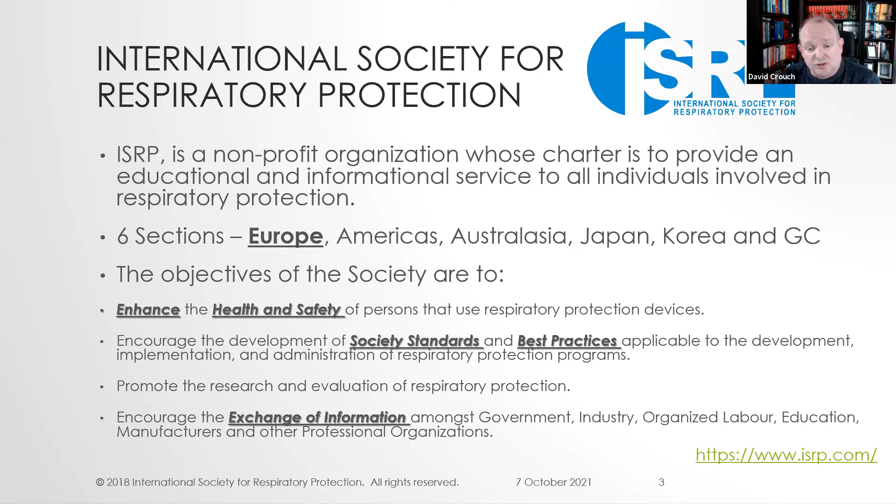So that brings us on to today's education program. The aim of our education program within Europe is to introduce attendees to different areas of airborne hazards, what type of respiratory protection is required, and how we can mitigate those hazards through new technologies and new understanding. The idea of today's webinar is around confined space, and we have 2 leading experts to discuss the background theory and practice behind confined space operations.

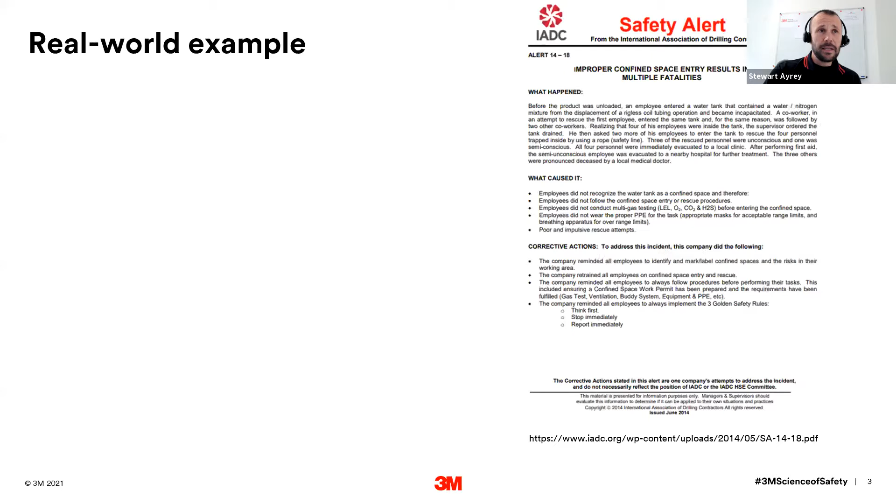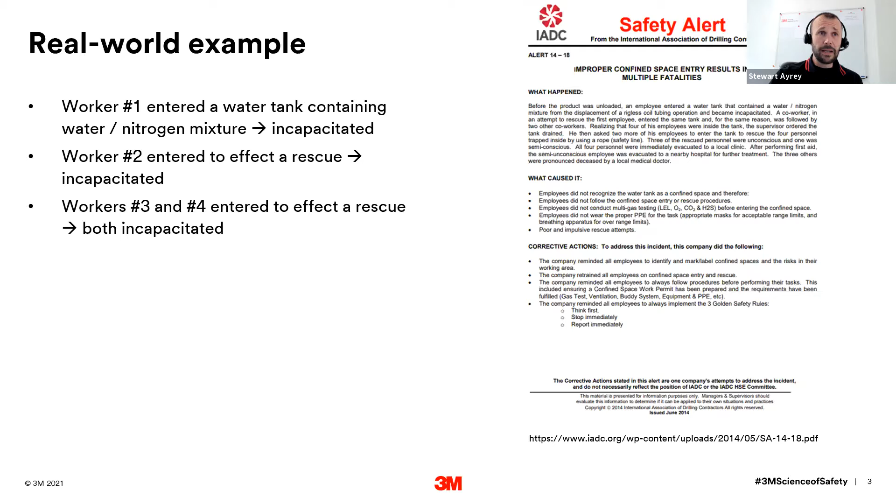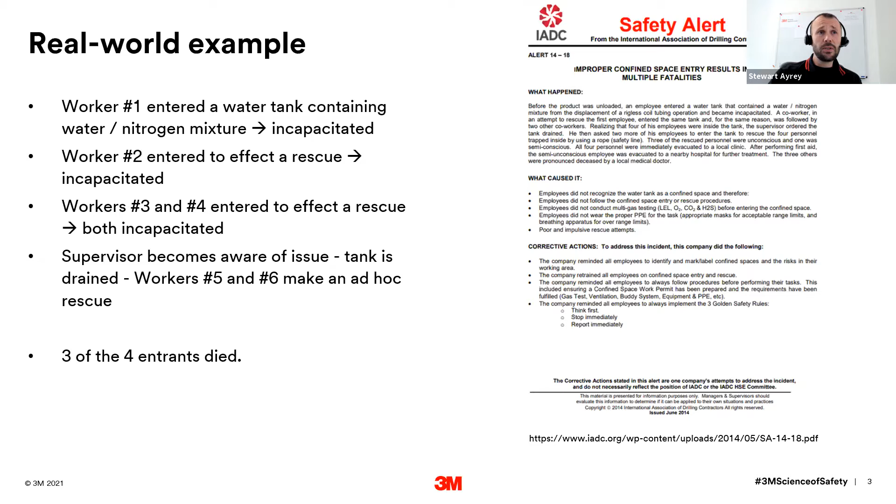Why are confined spaces dangerous? Well, this is an example from the real world, taken from the International Association of Drilling Contractors. It's quite recent, from 2014. A worker entered a water tank, which contained a water and nitrogen mixture, and he was incapacitated. A second worker who observed this entered to rescue his colleague. He became incapacitated. Two more workers saw what had happened, and they entered to effect a rescue. They too were incapacitated. By which point a supervisor became aware of the issue, the tank was drained, and a further 2 workers entered to make an ad hoc rescue.

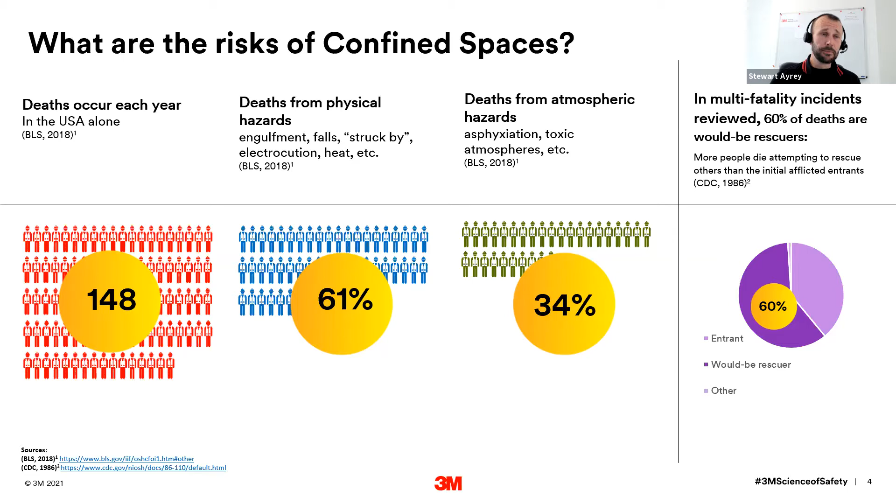Going back to that example I showed a moment or two ago, in a slightly older study, multi-fatality incidents were reviewed, and 60% of those deaths were down to would-be rescuers entering into a confined space to rescue somebody else. So this is exactly like what we saw before: an initial entrant succumbs to an atmosphere or a hazard, and one or more entrants then go in to try and effect a rescue. They're ill-prepared, and they succumb and die as well. Really very harrowing statistics.

permit access controls, physical controls, lack of atmospheric testing. Second thing is the lack of training, awareness with people who enter confined spaces that they are indeed confined spaces, lack of awareness of the risks, how to enter properly, and the correct procedures which should be in place.

And thirdly, the lack of appropriate equipment and PPE. Perhaps that may also be extended to ventilation, inappropriate gas detection, access and rescue equipment.

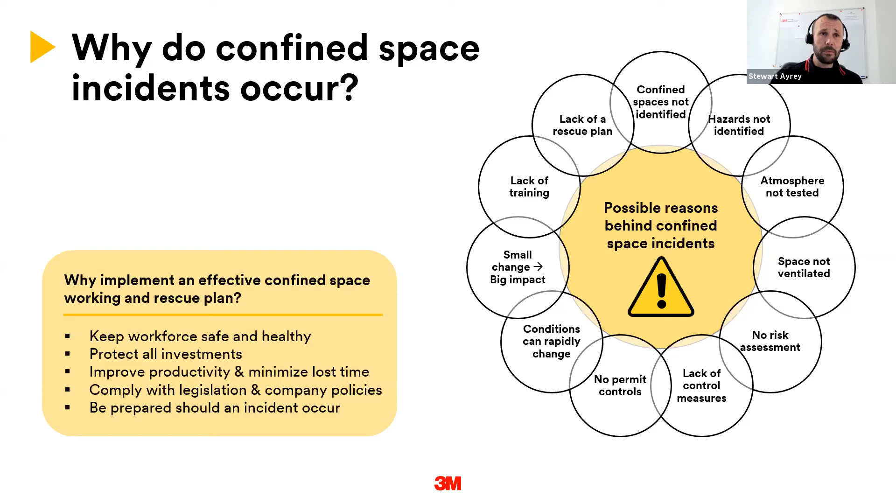So what are confined spaces? Well, I have to say that the definitions vary around the world. It really depends where you are. So do check out your local or national regulations, and the definitions do vary around the world.

But if I could surmise them all together, they have 5 common characteristics. Number one is their size, in that they are large enough and configured in such a way that a person can bodily enter and perform work. The entrance is small, it's limited, or it impedes easy entry and exit.

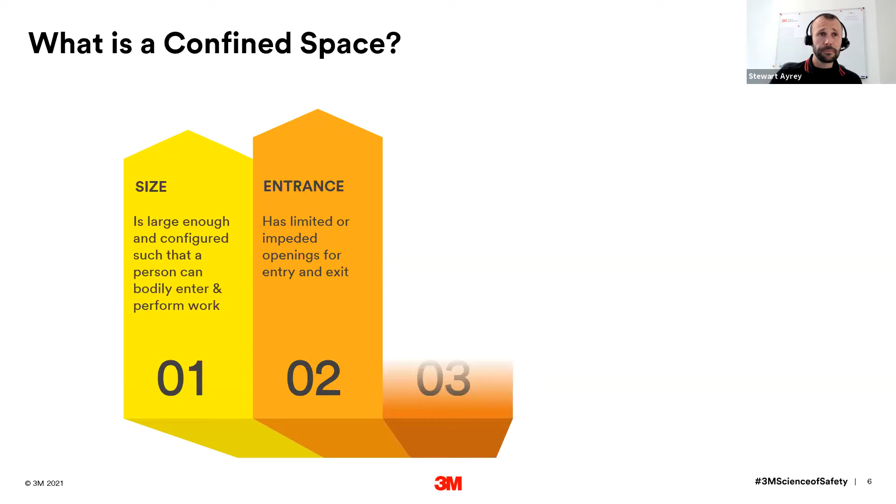Occupancy. They're not designed for continuous human occupancy. So they are something like a storage tank where normally a person would not go in to work, perhaps daily, to perform a task. There's something where somebody goes in occasionally, and when they do, it may be briefly or for a long period of time to perhaps do quite large remedial works.

Rescue. The provision of emergency response services is compromised. By this, I mean, if you, say, had a heart attack, a paramedic could not just simply walk straight in like you would into an office and be able to provide medical assistance.

The means of entry is restricted. It's difficult to get the emergency services immediately to somebody. And then, of course, and quite importantly, confined spaces often contain a hazard, a specific named hazard, which can pose a significant risk of illness or injury to those who enter.

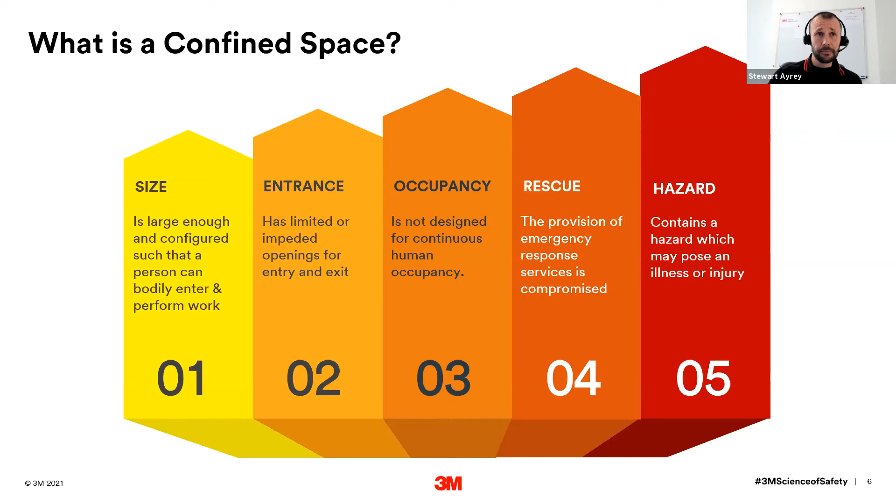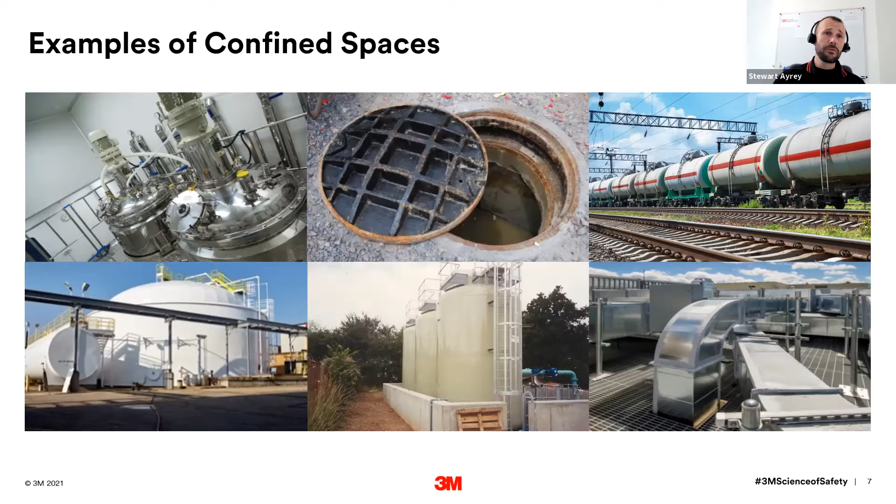Here are lots of images of potential confined spaces. Some of these are pretty obvious, like a manhole, a sewer, a tank. Some are perhaps a little less obvious, maybe heating and ventilation, air conditioning controls on a large building, or a reactor vessel in a chemical or pharmaceutical manufacturer. And I'm sure we're going to see a few more examples from Laurent, who will follow me.

What type of hazards are we going to find in confined spaces? We're going to find configuration hazards. These are things like risk of falling, entrapment, unprotected edges, fragile surfaces, sharp edges, ground conditions.

We're going to encounter things like physical hazards, electrical hazards, mechanical hazards, obstructions, excess temperature or excesses of temperature, very low or very high temperatures, pressurized gases and liquids, free-flowing liquids and solids, restricted movement, all sorts of different things.

We may encounter biological hazards, whether they are infectious agents, bodily fluids, biopharma processes, sewage, wastewater, stagnant water, rodents, rodent droppings, insects, snakes, and also things like poisonous plants, molds, and fungi.

And perhaps because we are the International Society for Respiratory Protection, we're obviously going to pay a little bit more attention in this webinar to atmospheric and chemical hazards.

So obviously we're talking about things like oxygen deficiency, but also oxygen enrichment, explosive atmospheres, asphyxiation, toxic atmospheres, and other chemical exposures, anything from active pharmaceutical ingredients, solvents, and other chemicals, and particularly those chemicals which may be encountered when cleaning or cleaning out a confined space.

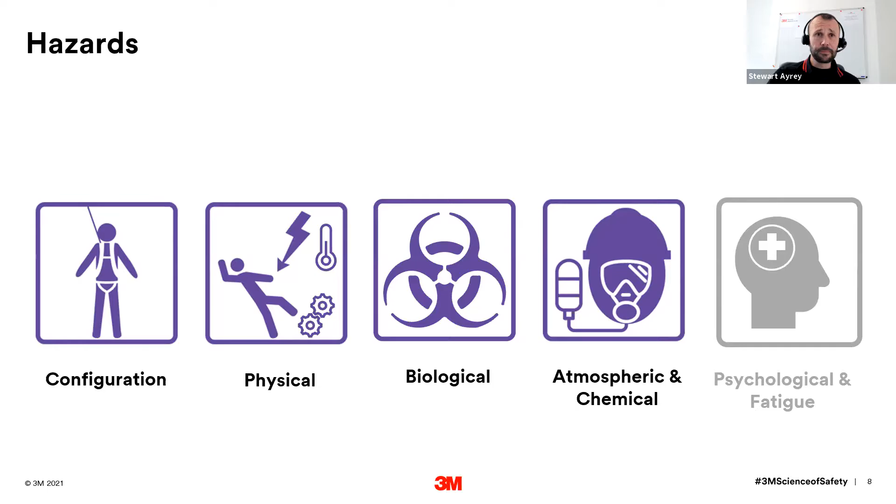The important thing to also bear in mind is that a variety of different types of people can enter. They could be from the host employer, so the company that owns the site. They could be facilities management, specialist contractors, maybe on a maintenance or repair shutdown, a rescue team, or emergency services. So control of your spaces can be very difficult due to the range of tasks and people who may need to enter them.

When we're looking to enter a confined space, we need a safe system of work. This is quite a UK term, so you may understand this with different terminology.

It may be very prescriptive depending where you are in the world, but generally these 9 steps form a solid basis, a solid safe system of work for entering a confined space.

First of all, we need to identify all of the potential confined spaces on site, prioritize them, and know what the risks are within them. Do you need to enter the confined space?

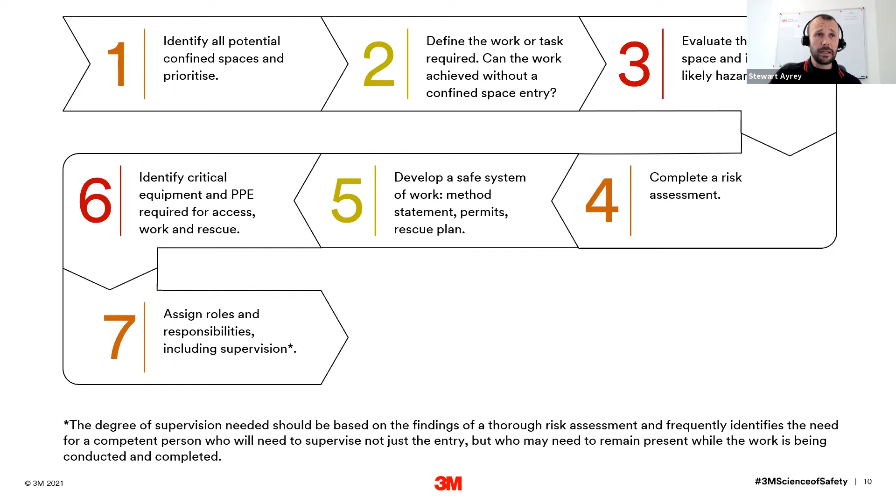From that, you can identify the equipment and PPE you will need for both entry and rescue. You need to assign roles and responsibilities to all of the entrants, the supervisor, the attendants, and the rescue team.

You need to check that all involved are trained and provide training and certification where required. Remember, competency is critical in confined space entries. And then finally, before you can enter, complete your permit controls and access the confined space.

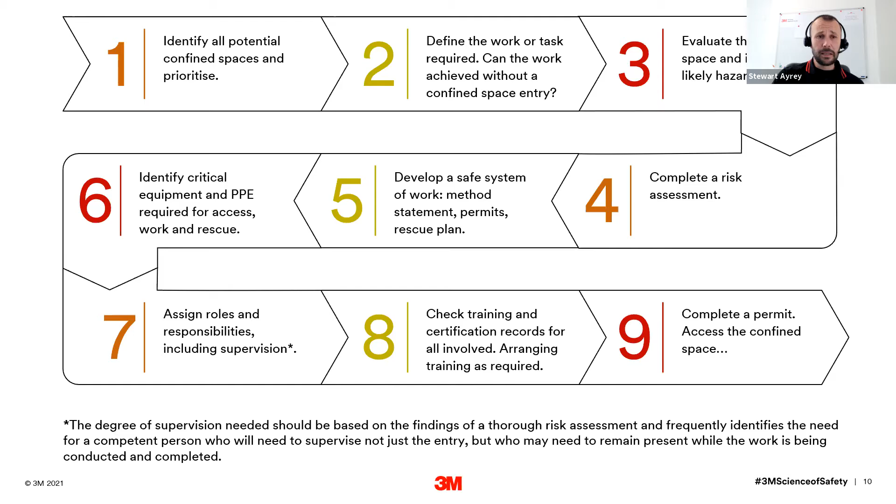At 3M, we like to break things down a little simpler into the ABCs and the DEFGs. And we'll go through each of these in turn.

Starting with anchorages, A, there are a whole load of different ways of accessing a confined space. It depends whether you're going in horizontally or vertically. And of course, sometimes you can go horizontal and then vertical.

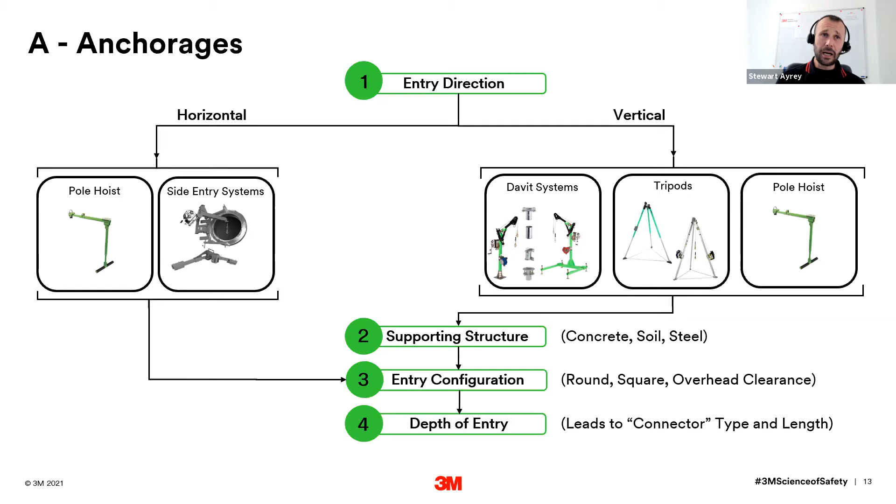Remember that there are lots of access equipment solutions to get you into confined spaces. It's very rare for you to be able to walk in and out of a confined space simply. And actually maintaining an anchor and a lifeline to any entrant, as I will demonstrate later, is critical.

So you may be familiar with tripods. These are fantastic for simple vertical entries, like those you can see. But often you may encounter a bit of a challenge where a tripod can't be used.

There may not be space for the tripod. You may be working up against a wall or a drop, or a tripod can't get around the space.

In these types of situations, davits can be fantastic to solve your access problems, whether they be a temporary solution, maybe counterweight with weights or a vehicle tow bar hitch, or they could be a fixed base.

There are lots of different solutions here, and they have lots of novelties and features which can help with access and rescue.

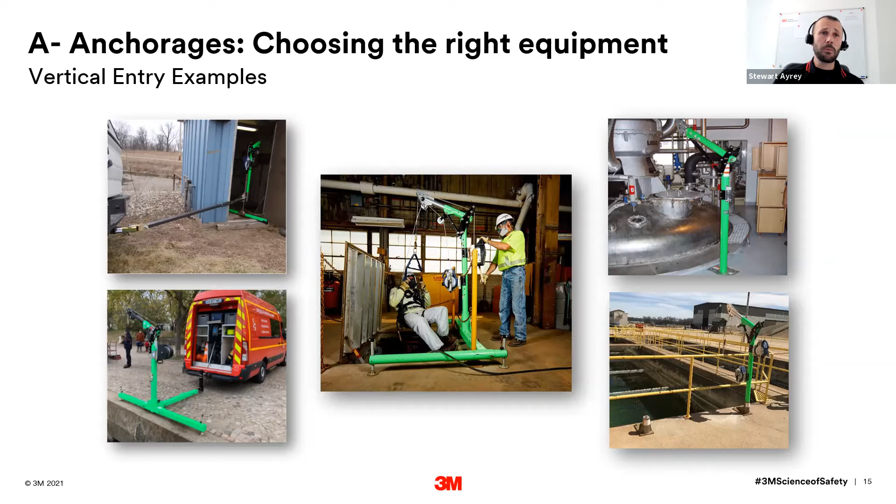You may be going in horizontally, and something like a pole hoist can help you maintain contact and a lifeline to your entrant. And they can also sometimes be used vertically.

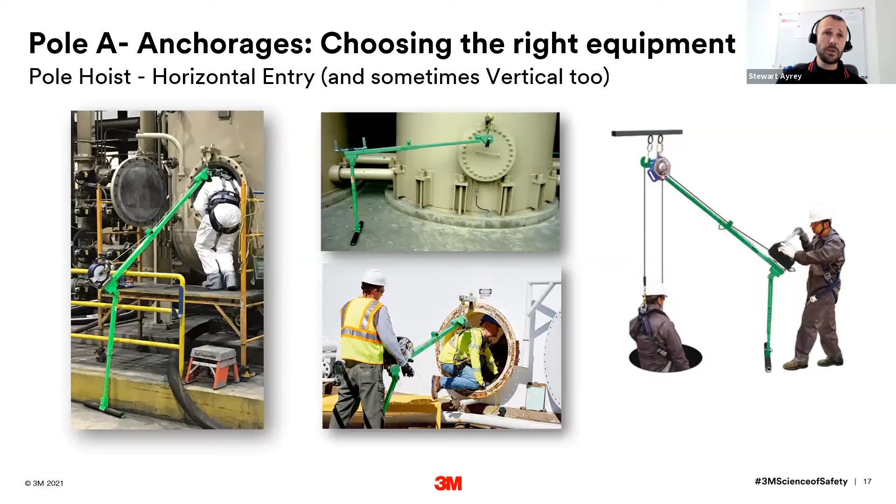The B is for body support in our ABCs, and there are some specific harnesses which we would encourage people to use, whether you're entering vertically or horizontally.

In fact, in some countries it is mandatory that all confined space entrants wear a harness because they can greatly help with rescue by having attachment points for lines, for hooks to be attached to people, for lines to be connected, or for just man-hauling people out if the worst happens.

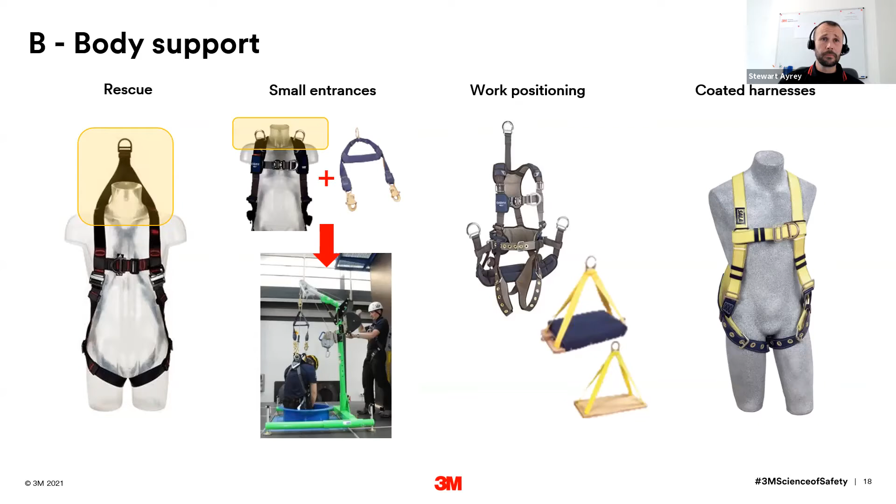Connecting devices are the C of our ABC. So if you're entering vertically, you may have a ladder, so that's your primary connection, but there's a risk of falling. So something like a retrieval SRL, a self-retracting lifeline, may be an extra component, but you may have to be lowered in if there's no ladder.

Therefore, a primary connection is one line on a winch. And again, there's a risk of falling. So a retrieval SRL with a winch, a second winch as a backup, is a good idea.

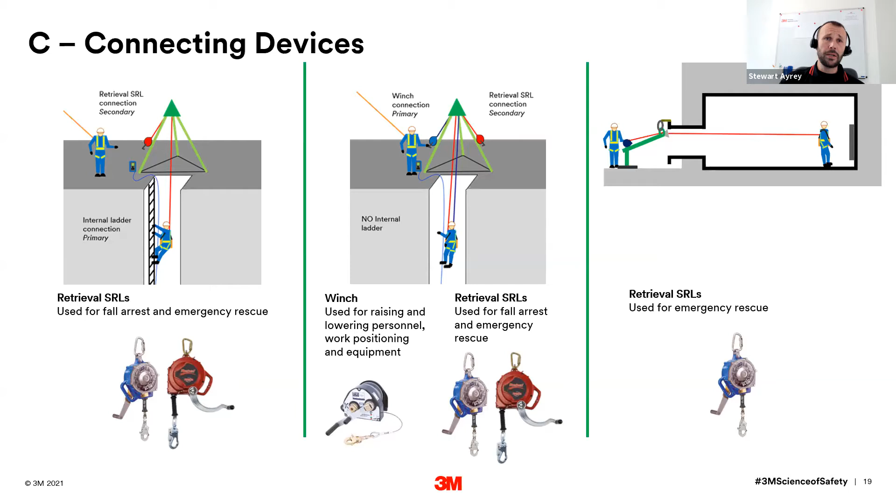But even if you're going in horizontally into a tank, using a retrieval SRL with something like a pole hoist gives you a permanent connection to that entrant. If they succumb, the attendant can instantly engage the winch and haul the entrant out. We'll talk about that a little bit more.

D, detection, purging, and ventilation. This is where I'm going to spend a little bit more time. So, detection of the atmosphere.

We can have a whole range of atmospheric hazards within confined spaces. Low oxygen levels, high oxygen levels, as we've mentioned before. It's always great to know what was in the confined space previously. Is there rusting metal or organic materials? Is there decomposing organic materials, solvents, degreasers?

Perhaps you're taking in the atmospheric hazard when you're cleaning, or perhaps you're conducting welding, maintenance, hot work, which could consume oxygen, or the shielding gases or byproduct gases from welding could create an atmospheric hazard.

And of course, in these scenarios, you're looking at personal atmospheric gas detectors and maybe area monitors as a backup as well.

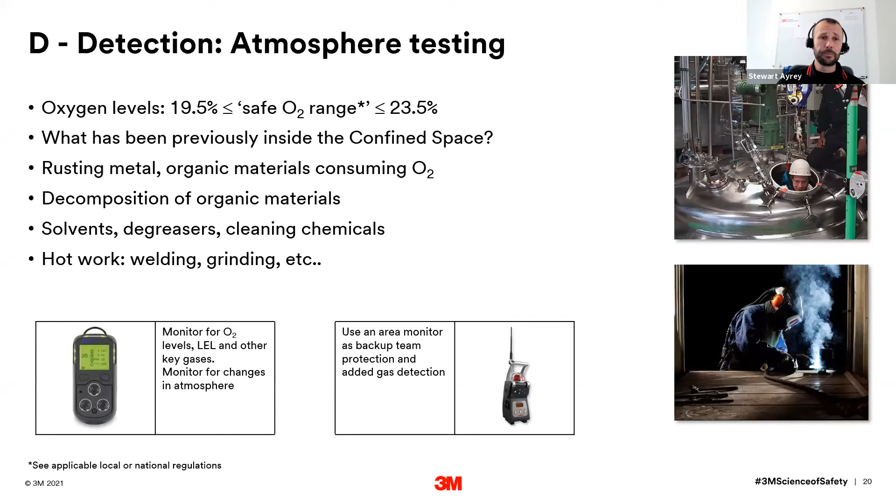And why is it important to test for the atmosphere in a confined space? Well, typically the atmosphere doesn't change and it lays stagnant. And then we can get stratification of the gases within the atmosphere.

So those lighter than air gases may go to the top, and those which are heavier than air, a greater specific gravity, may settle to the bottom in different layers. When we're looking to enter a confined space, we need to test around the entrance to make

sure we're not leaking something and there's an immediate hazard even outside the confined space. Then we want to maybe crack the lid and test again. And when all is safe, we need to test at different heights down and through the confined space so we truly know what is in our confined space.

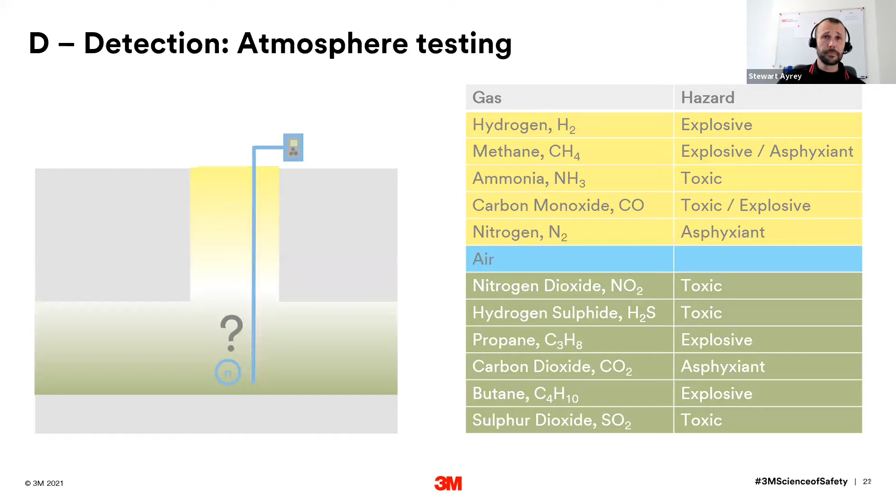And here's an example of why it is important for every entrant to have their own personal gas detector. They can enter, it's been deemed safe, but they can move within the confined space and encounter a pocket of lighter than air gas, perhaps by moving upwards into a different space. And a gas detector can help them there.

They could go lower and encounter a different atmosphere. Or their action, perhaps cleaning the sludge out of the bottom of a storage tank, could actually create the hazard itself. Different atmospheres can be encountered throughout the space or during the work.

If I was to enter this space and encounter an explosive atmosphere of toluene, my portable multi-gas detector will go into an alarm at 10% of the LEL, which would be 1,100 parts per million. But that alarm state is significantly higher than the TWA or the STEL. So I cannot rely on my gas detector to tell me when I am in a potentially hazardous environment.

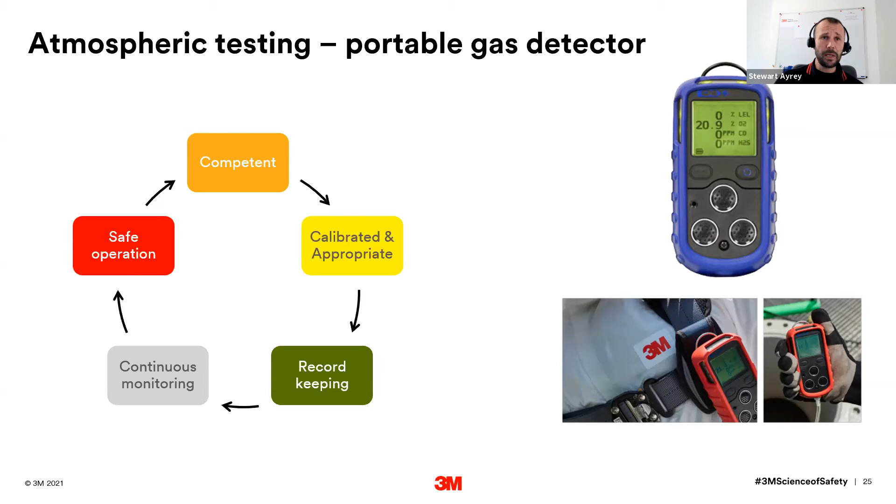And it needs to be operated in a safe manner that doesn't risk the safety of the people inside the confined space.

Ventilation is also one of the key parts of managing atmospheric hazards. On screen is a general guide to push and pull ventilation: forced ventilation, push, and local exhaust ventilation, pull.

Whatever you do, you need to match your ventilation system to the air exchange requirements for the space. So if you need to do a certain number of atmosphere exchanges and the volume in the space is such, you can work out roughly the capacity of the ventilation system you need. Do account for airflow loss as well, with all the twists and turns, diameters and lengths of your piping.

And as you can see, different push and pull systems are perhaps more suited to different hazards, emissions, gases, vapors, particulates, and how the contamination may be found.

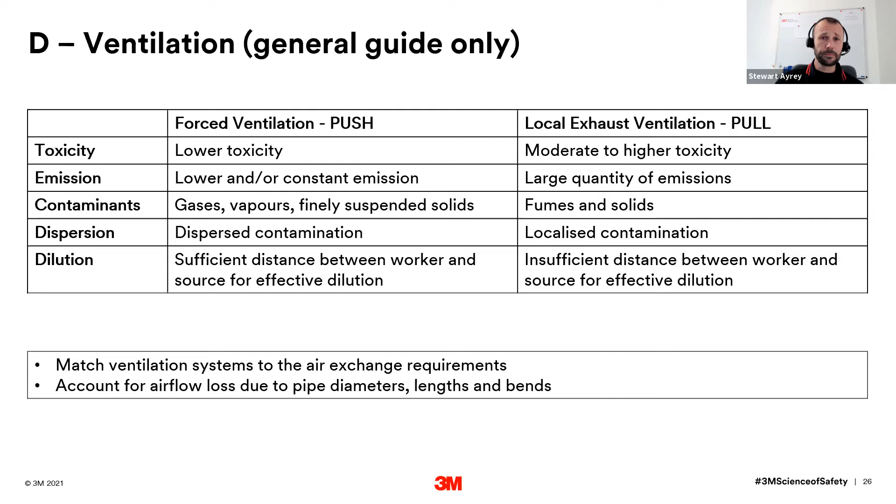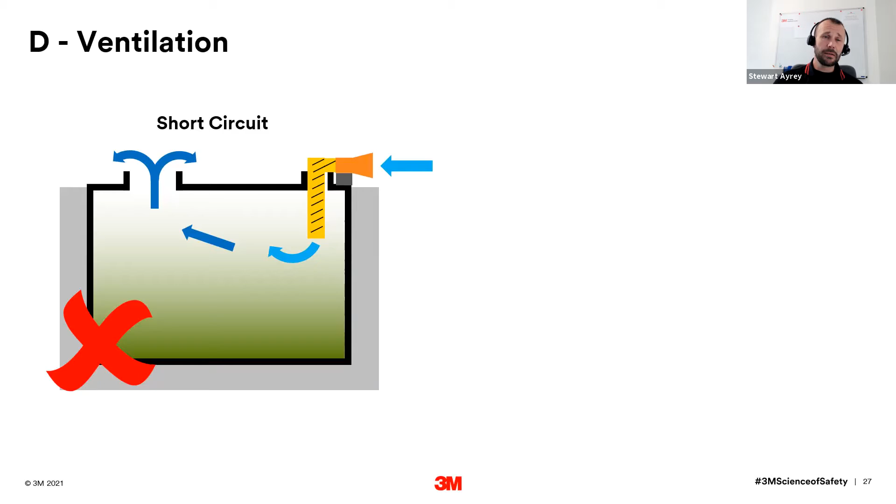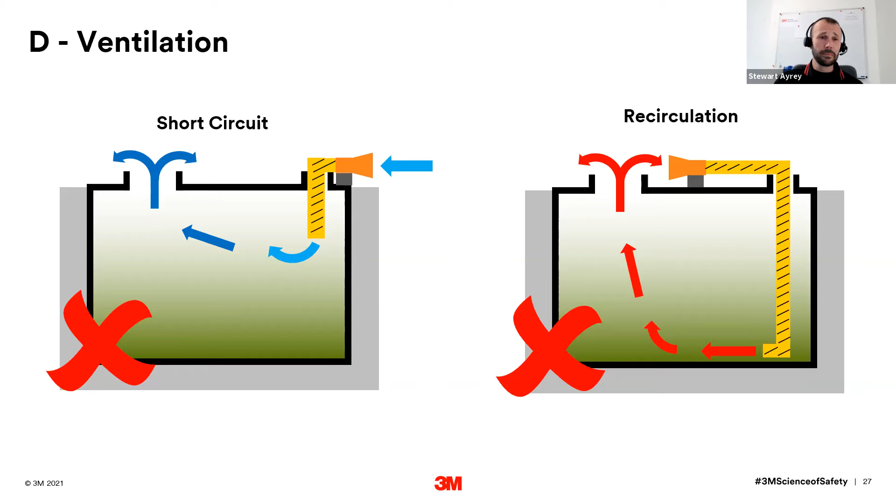Forced ventilation can be used to dilute the contaminants, and it's more suitable when the contaminants are relatively low toxicity, the emission rates of releases are constant, or they're smaller quantities. The contaminants are finely suspended solids or gases and vapors, and the release is widespread. And there's sufficient distance between the worker and the source to allow for effective dilution to take place.

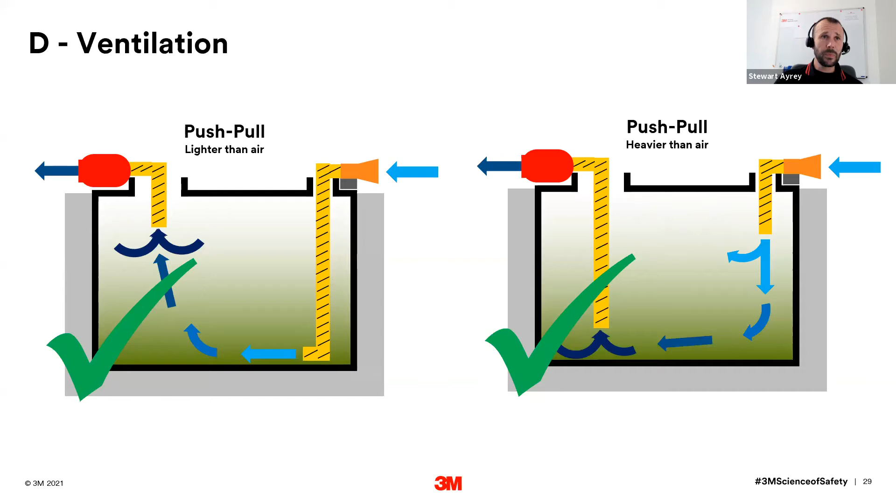Another atmosphere we may encounter is explosive atmospheres, and it's quite common here to have to purge the atmosphere using a purging gas like nitrogen, argon, or carbon dioxide. Without stating the obvious, we've got an explosive atmosphere, so that is an obvious hazard. But by purging, we can also create oxygen deficiency. We can have residual explosive atmospheres if we haven't purged properly, and we need to exhaust that atmosphere from the confined space somewhere. All things to consider. Of course, ventilation follows purging, and of course, testing the atmosphere before entry.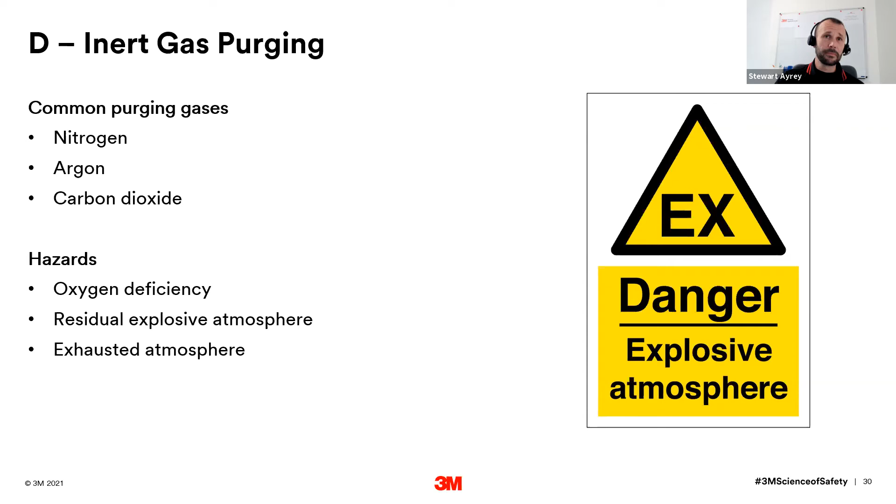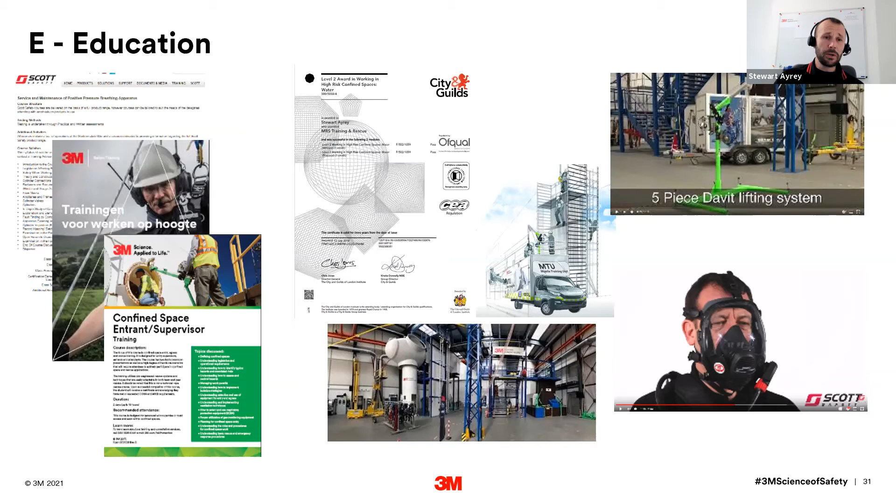The E of our ABCs is education, critical for all involved to know how to enter and work inside, exit, and potentially rescue others from a confined space. There are many, many courses out there you can go on to become trained and competent.

F is full body protection. Remember, there's lots of different challenges in there. Different types of PPE may be required, but one of which often is respiratory protection. Remember that air purifying products are potentially suitable if you're cleaning some relatively low, inert or non-toxic particulates. A filtering face piece could be entirely appropriate.

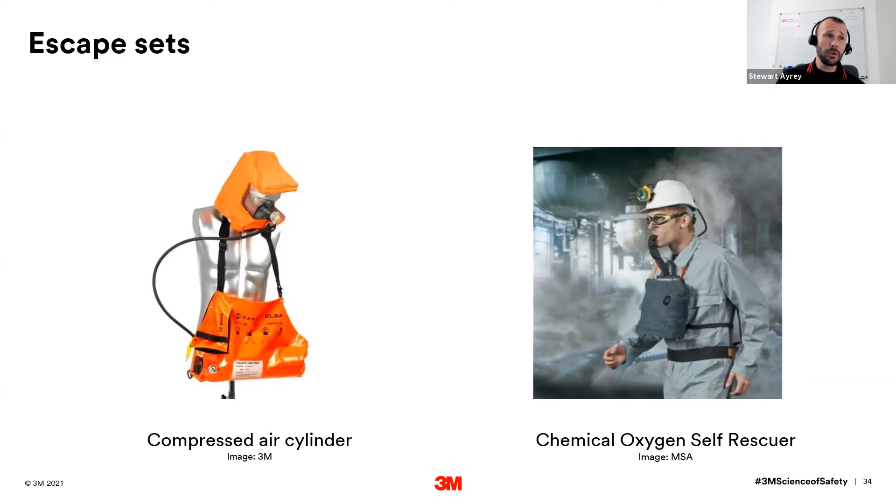But for other scenarios, there are a range of breathing apparatus you can consider, from emergency escape, airline, through to self-contained. And just to give you a flavor of these, escape sets can be compressed air, or they can be chemical oxygen self-rescuers. And these are used to give 10 to 15 minutes of breathable air for an entrant to use to escape from a confined space or any other workplace where an atmospheric hazard could be encountered. They should not be used for working or rescue.

If you are having to go into a confined space for an extended period of time and you know there's an atmospheric hazard, then maybe an airline breathing apparatus set is appropriate. So you have a source of air outside, and you're connected by hoses to a pressure demand valve full face mask. Some of these actually have an escape set built in, and if the air source outside is interrupted, you have up to a 15-minute cylinder which automatically kicks over, or in some cases has to be manually turned on, which allows you to escape.

These types of solutions are great because they're smaller and lighter weight than SCBA, which we'll see in a moment. Because SCBAs, although you've got different cylinder sizes and pressures, are generally quite large and bulky, and your working time can be limited. To help you make decisions, there are decision trees. I don't have time to go through this today, but we have from 3M, and I'm sure other manufacturers do, the tools to help you decide the most appropriate respiratory protection.

And then onto the G, get them out, the rescue hierarchy. Well, the safest rescue, the lowest risk, is a self-rescue. You encounter an atmospheric hazard, your portable gas detector goes off, you don your escape breathing apparatus, and you escape from the confined space yourself. The next in the hierarchy is the non-entry rescue, where an attendant can rescue you without having to enter. You remain attached to a rescue or a safety line, as you can see on this davit, and you can be winched immediately out should a hazard be encountered.

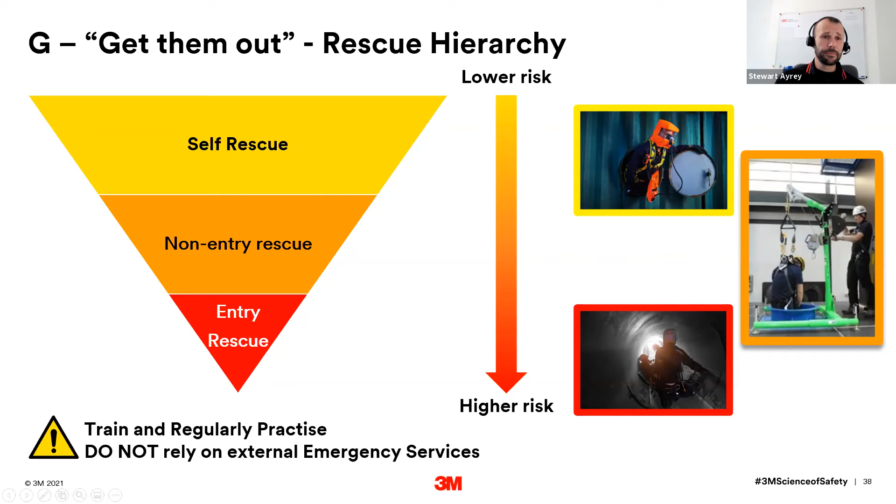The highest risk entry is an entry rescue. Others have to don equipment, enter the space, find the entrant, pull them out, and get out safely themselves. It takes time and it puts others at risk. So if I can say one thing to you, designing the correct equipment and access solution can help significantly in minimizing the risks with confined space entry.

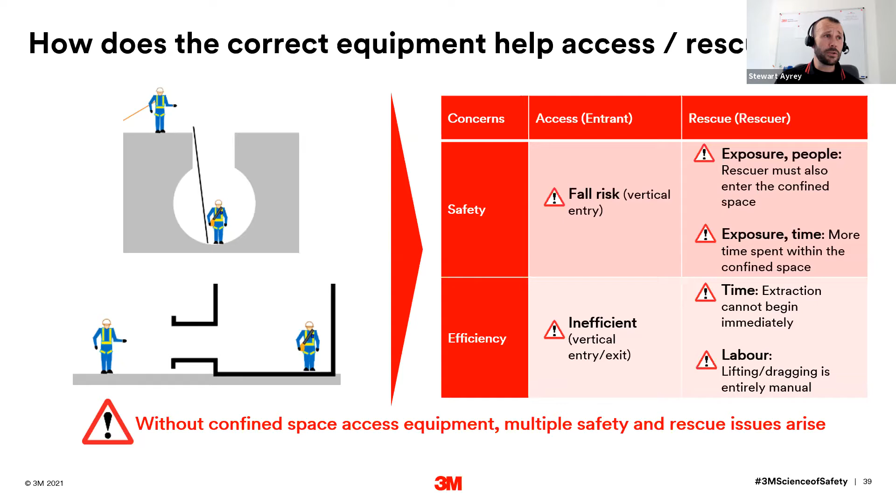By designing a good, effective solution, we can minimize the risk of falling. We can provide safe access into a confined space. We can reduce or eliminate the need for others to enter the space, and we can reduce the time it takes for an extraction to take place. We can also provide mechanical advantage to lift people out of a hole or drag them to an exit point.

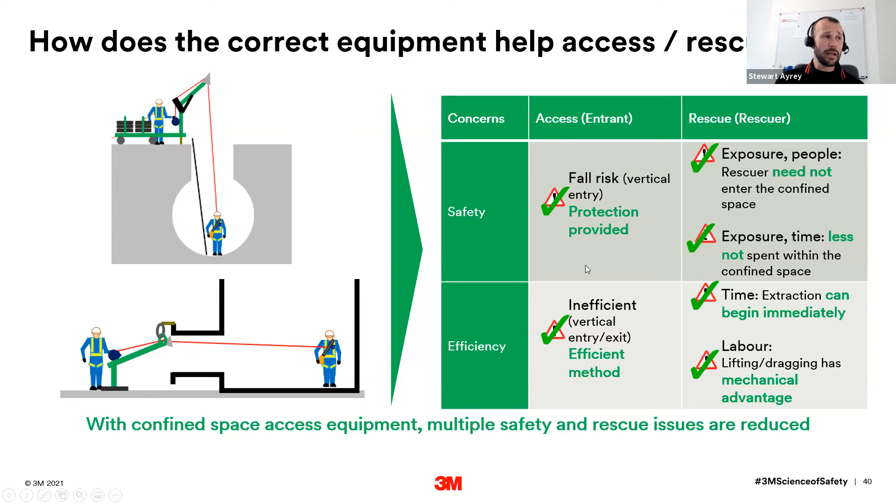Conduct your risk assessments. Eliminate the risk as much as possible. Follow the rules. Implement a robust, safe system of work. But always plan for rescue. Plan for the worst case and practice it, because unfortunately, the need to rescue confined space entrants is ever present. And when the worst goes wrong, having a competent team and a rescue plan available is your best course of action.

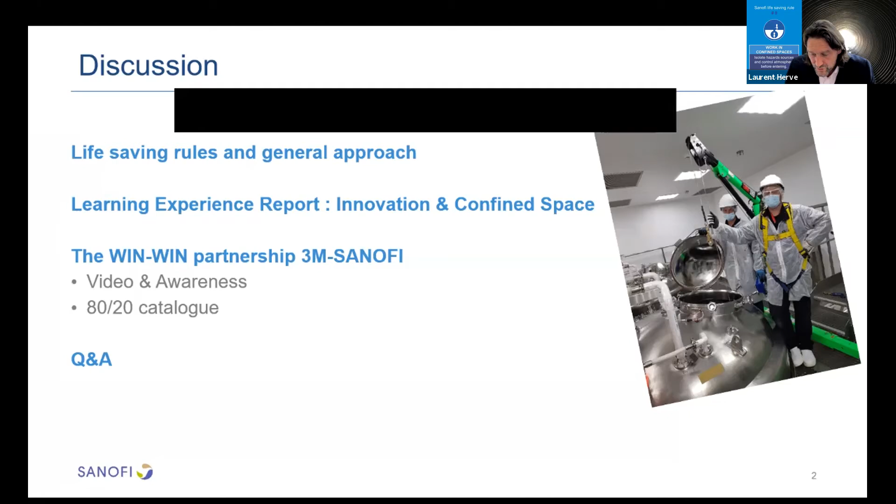And after, I would like to share with you the win-win partnership between 3M and Sanofi in terms of a lot of actions, video awareness, and the 80-20 catalog, and for sure after some Q&A. Yes, you know, Sanofi is a very huge pharmaceutical and chemical company. I think it's not necessary to present this company.

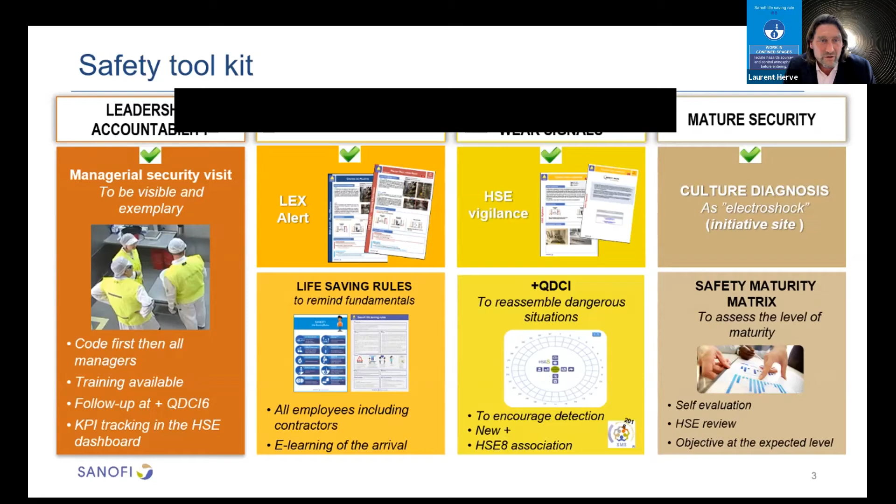So as a lot of huge companies, we have a very complex and sometimes very heavy HSE management system and HSE culture, for sure. It's always improving, because in this area it's always improving, but we have a lot of tools. And I would like to focus on one: life-saving rules. The life-saving rules are quite new in Sanofi, because for a long time we had a lot of SOPs, a lot of training sessions, and so on.

But the life-saving rules, it's just 4 years ago, and we implemented that in the group. And why I would like to share with you this practice: because we introduce directly in the life-saving rules the work in confined space, and at the same level, work at height. And typically, these life-saving rules are committed by the ExCom of Sanofi, and they are very involved in that, and for sure, all employees must have personal training and a roadmap. And for management, exactly the same, and they need to reinforce the message for each employee.

For example, if you are only in an office building, you must follow these life-saving rules. And typically, if you are in a chemical plant and so on, for sure, it's mandatory too. And it's a very short message. You will see in a few slides what I mean. It's "I will always, I will never." But these rules aim to protect life, for sure.

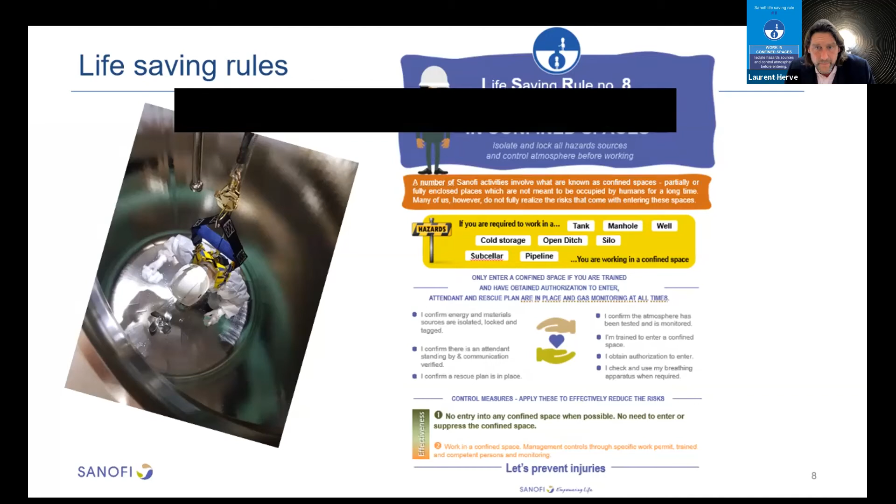And so it's for this reason the life-saving rules are the fundamental message. It's the basis of HSE culture in Sanofi. It's a very light message compared to what Stewart presented, but it's just the first level of information about this subject. Another thing, the picture you can see on my slide, it's in a Sanofi plant. It's this vessel, from Val de Reuil, with vaccine. It's a current topic in vaccines.

You have a lot of SOPs and you have a confined space management standard, specific procedures by site and so on. And we have a lot of information on the health and safety web interface. But now, if you agree, I would like to show you a technology innovation to avoid entering confined spaces. Chattanooga manufactures a lot of liquid forms. It's a plant in the US, and they're using a lot of large tanks. And for quality and sometimes cleaning and maintenance, they need to enter the tanks. And so for sure it's confined space, and it's a very dangerous and painful operation.

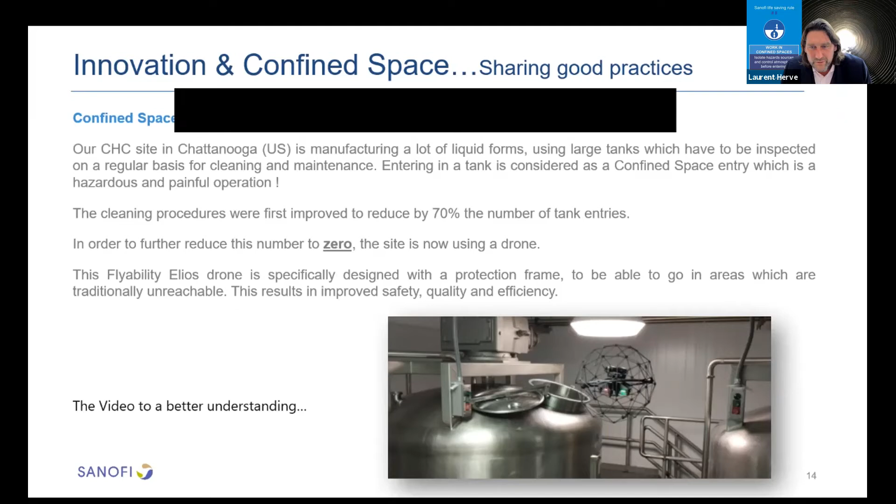So the management wanted to reduce, first of all, by 70%, and after to go forward to intend zero entrances in confined space. So sometimes one video is better to understand what I mean than speaking. So it's just 2 minutes, and after we go back to discuss this subject. Sorry.

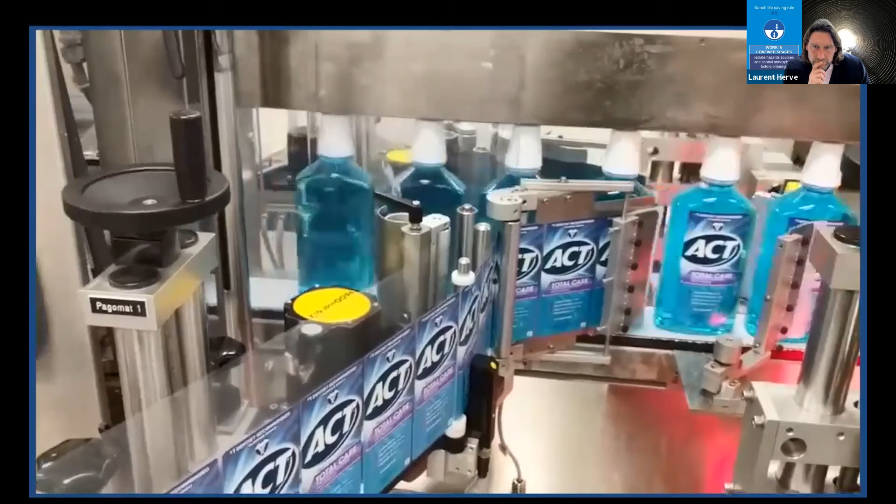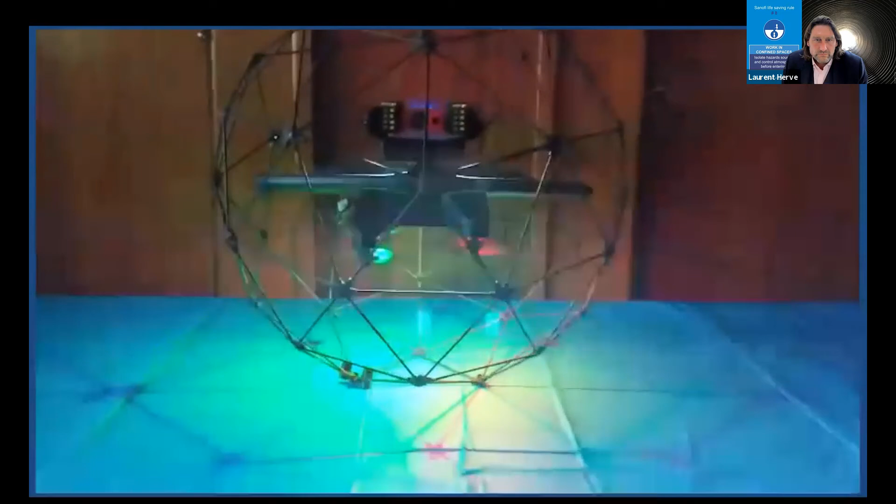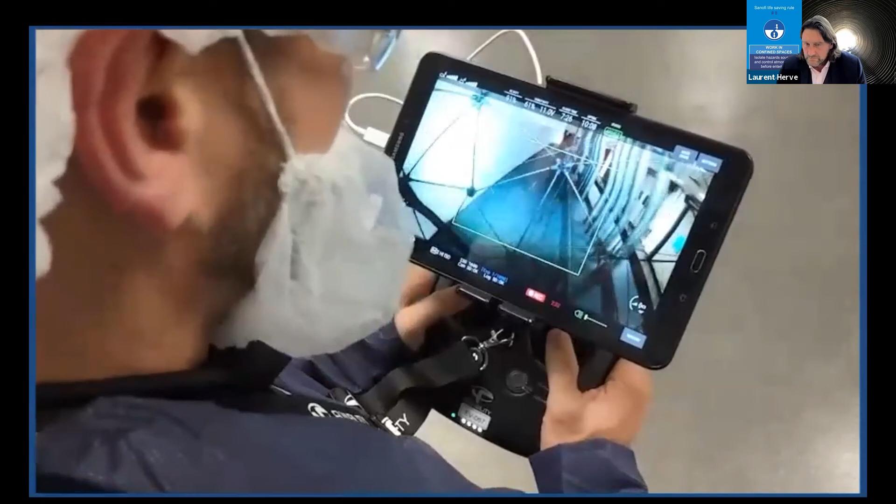At Sanofi Chattanooga, we are using the latest technology and breakthrough innovation to improve process efficiency, product quality, and employee safety. Strategic problem solving, engineering new technologies, and implementing new procedures has allowed us to dramatically reduce confined space entries by over 65%. It's management's responsibility to support innovation. 500 confined space entries per year. We had to change this. The use of sophisticated clean-in-place spray nozzles, as well as enhancing our current cleaning procedures, laid the groundwork for this success. Reducing confined space entries creates a safer environment for our employees, improves quality by designing robust cleaning procedures, and increases efficiency by reducing cleaning time. The only required tank entries remaining are quarterly tank inspections. But how can we reduce our confined space entries to zero? Introducing the newest technology at Sanofi Chattanooga, the Flyability Elios drone. This collision-tolerant drone is specifically designed to navigate inside tanks, large pipes, various confined spaces, and inaccessible areas. The Elios has a patented carbon fiber spherical dome for protection. An onboard camera records video in 1080p high definition and transmits a live wireless video feed directly to the pilot's ground control system. This allows the pilot to operate Elios beyond the line of sight. Going into a dark tank with no lighting? No worries, Elios has got you covered. Elios has multiple powerful LED lights for the darkest vessels and is even equipped with thermal imaging to see beyond what the human eye can see. With the addition of the drone, it's made my job a lot easier by not having to enter the tanks. It's nice working for a company that takes the time and the initiative to take my safety into account. And with the use of this technology, we can reduce confined space entries to zero, further improving safety, quality, and efficiency. At Sanofi Chattanooga, this is innovation.

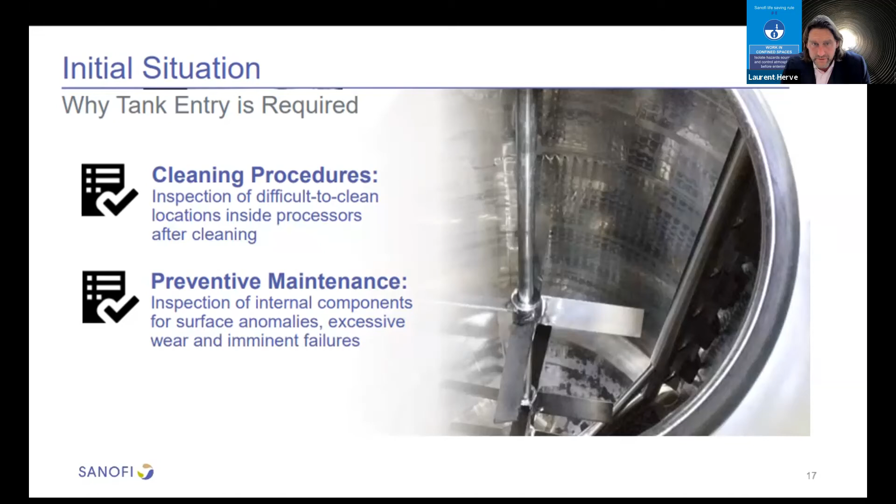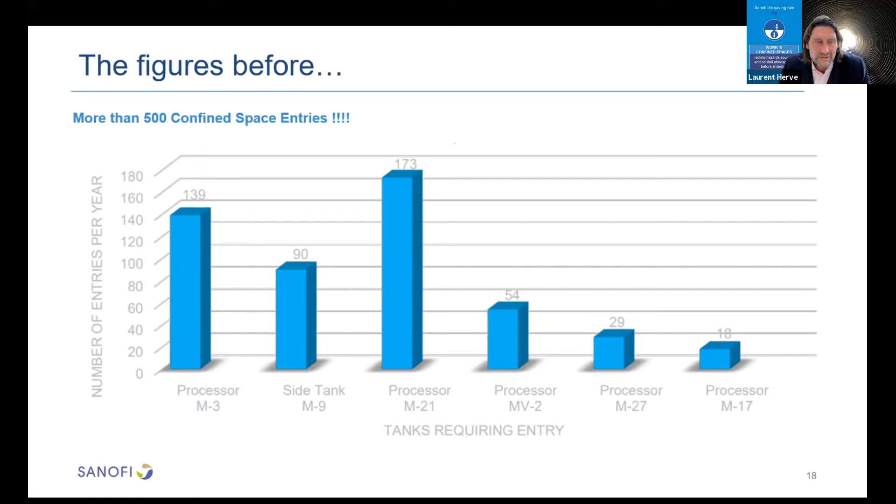So it's just to share this good practice, because we can see it in a few figures. In pharmaceutical and chemical companies, we need a very high level of requirement in terms of cleaning procedures and maintenance tasks. As the director explains in the movie, we conducted more than 500 confined space entries in this plant, and not only in Chattanooga but in a lot of Sanofi plants, and probably in a lot of pharmaceutical and chemical companies. So we can say yes, it's a normal situation.

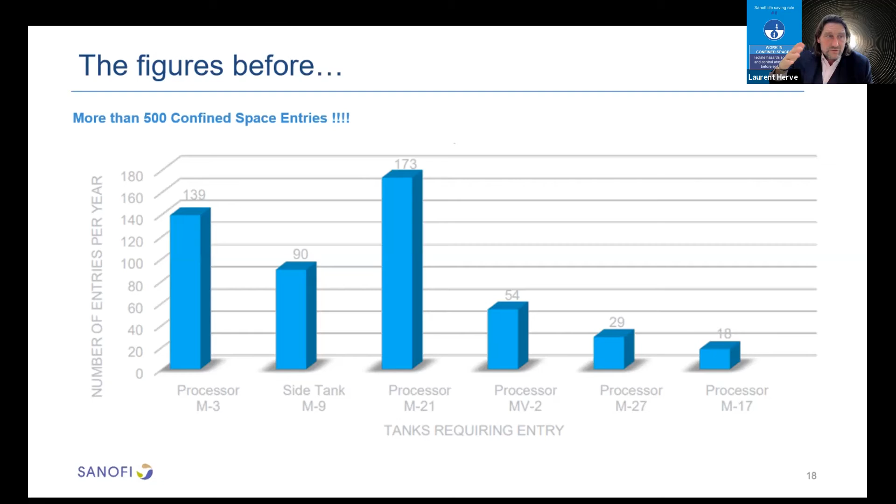But around this webinar there are a lot of HSE managers or operational directors, and they know the first step is to reduce the risk, and sometimes eliminate the hazard. But if that's not possible, it's really important to remove the risk.

In this case, it was very ambitious when we decided, now 5 years ago, to implement this good practice, and we have a lot of benefits from it. You can see it in terms of inspection times, air quality monitoring, and so on. Typically the main topics for us today are HSE risks, hypoxia, chemical exposure, and so on.

After a few years, you can see now, for exactly the same plant and exactly the same vessels, tanks and reactors, we have zero entries into the vessel. We had a very huge commitment from the whole team, and for us it's a very great challenge and a great success in terms of confined space.

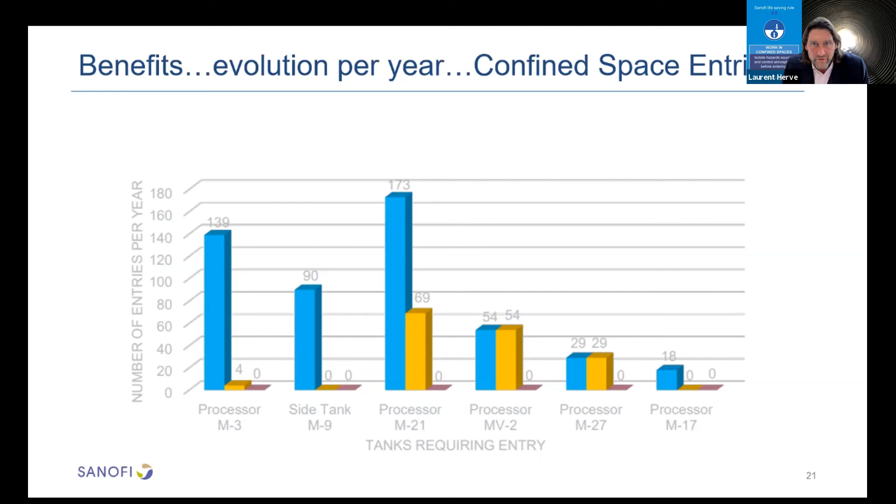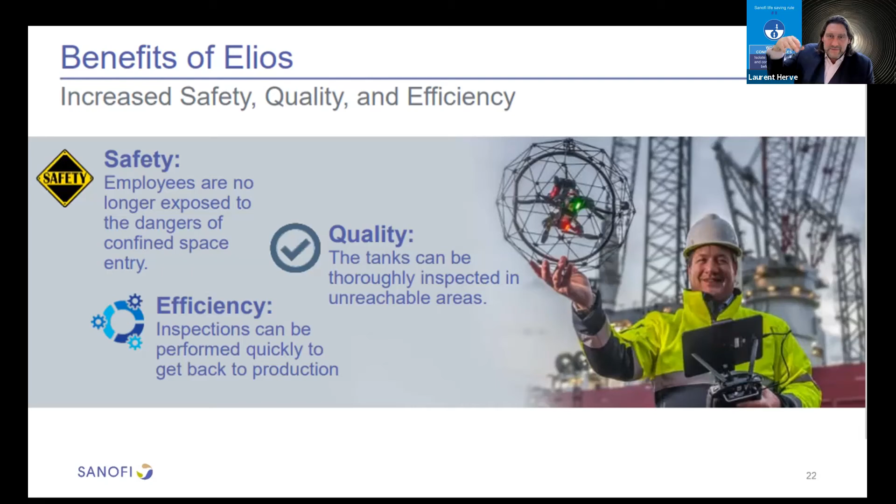What are the benefits of this kind of drone? It's not only safety, but efficiency and quality too. That's why we use it not only for confined space, but for inspection, for example for pallets, and for a lot of things.

I think the last word is for Brian, because Brian was very involved in this project. As he said, with this addition of the drone, it's made my job a lot easier, not having to enter the tanks. I think, with the smile, it's very interesting to have this background.

Another topic I would like to share with you, another key point, not necessarily of success because I am very careful with this kind of topic and this kind of sentence. But one key of progress and continuous improvement, for sure, is information.

In this area, I would like to really thank 3M, because we made a very strong relationship, and now we can measure a lot of very good ways to improve this kind of situation.

First of all, because Stewart says you have an SOP, you have a lot of standards, you have a lot of rules and so on. But after that, you are in real life. In this case, we made an HSE vigilance, a lessons-learned experience report. We saw during an inspection one person enter a vessel and not follow the rules. And it's not 10 years ago, and it's not in Asia - it's often easy to say that, but it's not the case.

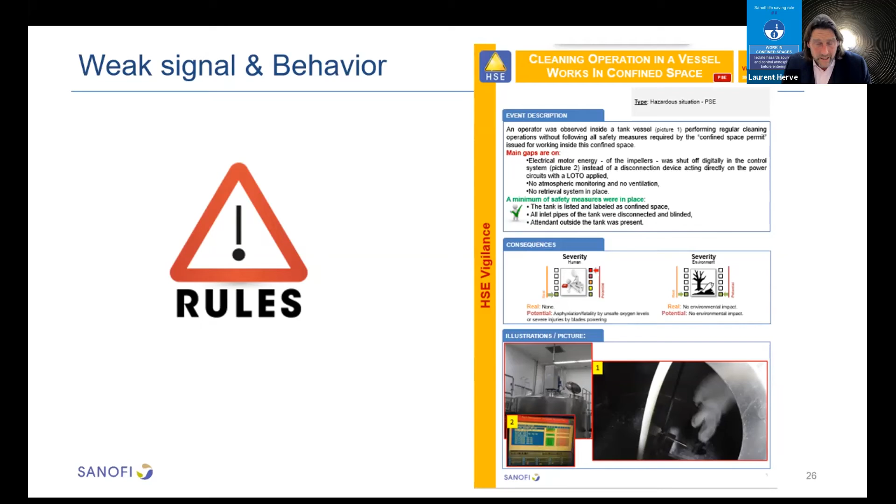But one of the things we identified is that often you have a gap between the SOP - yes, you have the right SOP, you have training sessions and so on - but sometimes you need a piece of the chain with awareness.

It's for this reason we made a very strong relationship with 3M to develop two videos. One on work at height. It's not today's topic, but it's very important because it's the first step. If you don't know how to secure yourself during work at height, it's probably difficult to secure yourself during a confined space task and so on.

We developed a specific video for confined space with 3M. Not the whole movie, because it's a quarter hour, but just a few scenes I would like to show you and share with you.

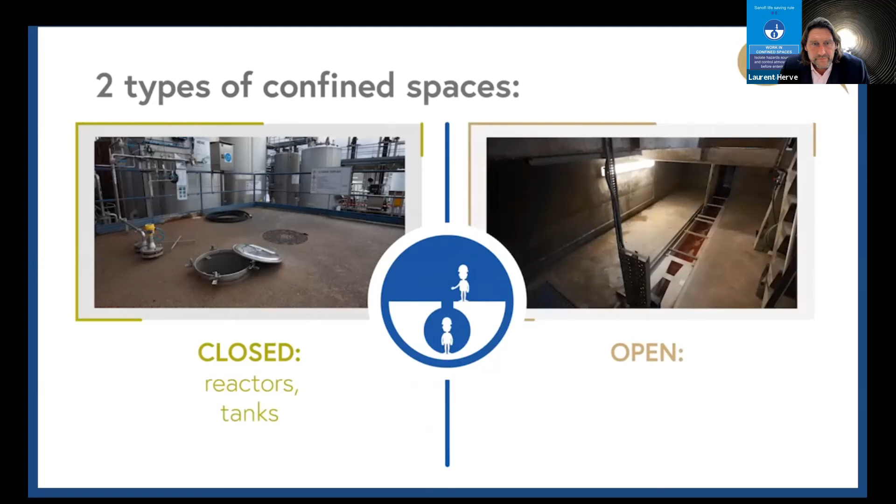Now let's review some examples of confined spaces that we may find on our sites.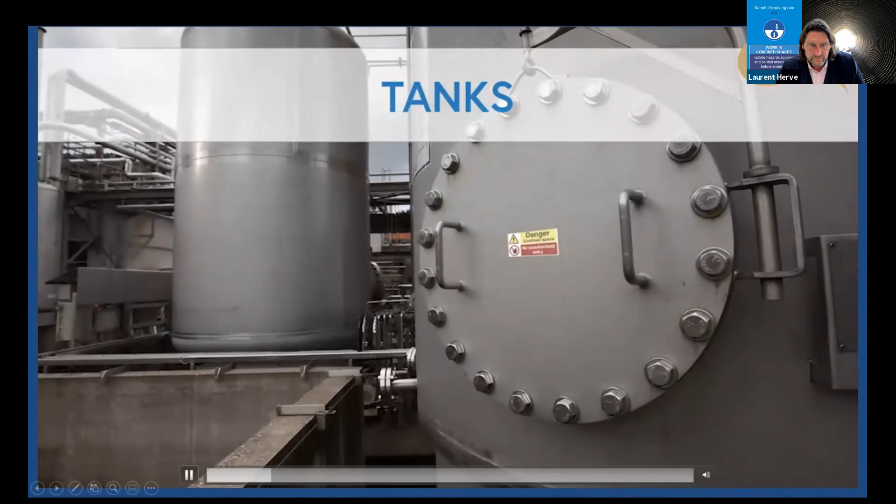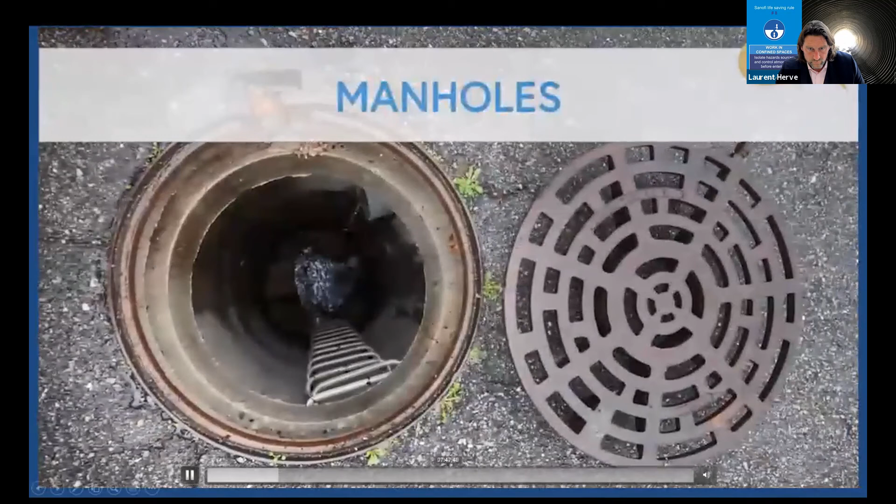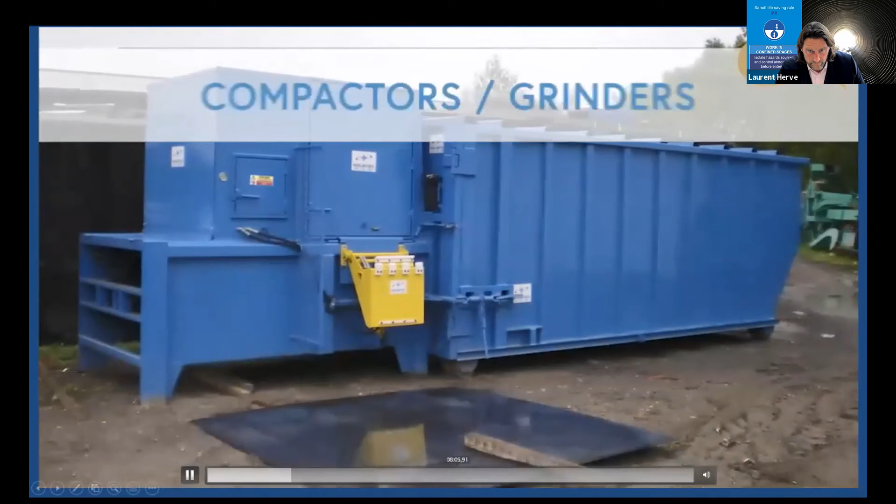Tanks, silos, boilers, large diameter pipes and ducts, chimneys, manholes, sewerage facilities, pits, wells, underground tanks, cisterns, reactors, mixers, dryers, autoclaves, compactors, grinders. Define ways to ventilate the space.

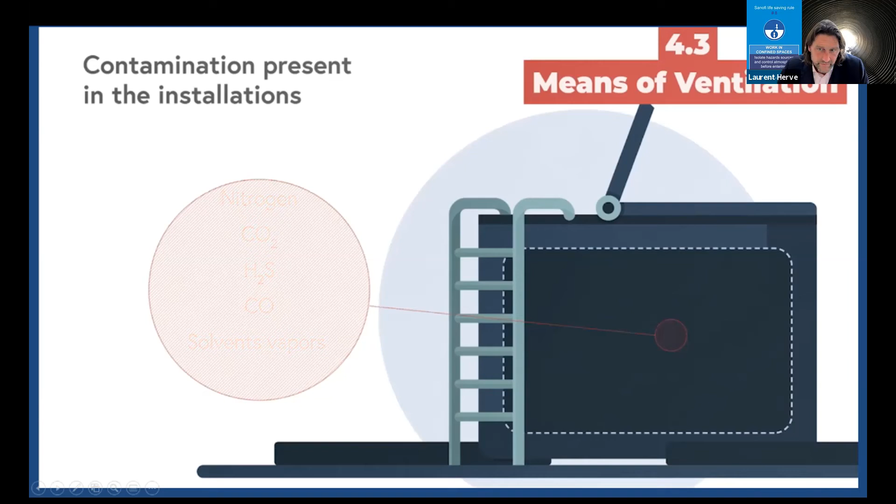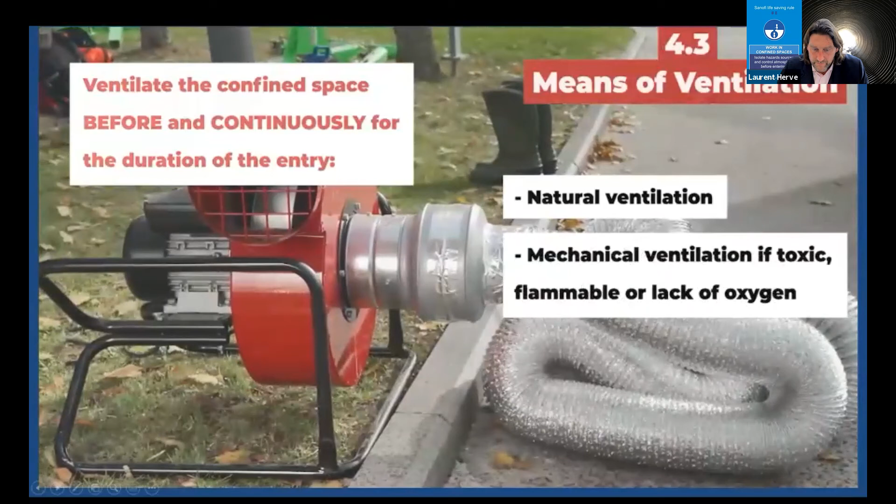Sources of toxic or flammable contamination of the atmosphere can be present in the installation or introduced by the entry work itself. To remedy this, the confined space must be ventilated before and continuously for the duration of the entry, by natural ventilation, or necessarily by mechanical ventilation if there are toxic or flammable materials or a lack of oxygen. Blowing must be favored; however, extraction may be used in cases of metalwork or welding, with the gas bottle kept outside, or for paint or resin. People using detectors are trained in their use and in interpreting measurements with respect to the thresholds for safe access.

Means of communication and alert. Define and test the means of communication between the attendant and the worker, and the means of alert between the attendant and the rescue team. Communication with the worker must be permanent: visual contact, voice, talkie or headset, or action on the connecting cable.

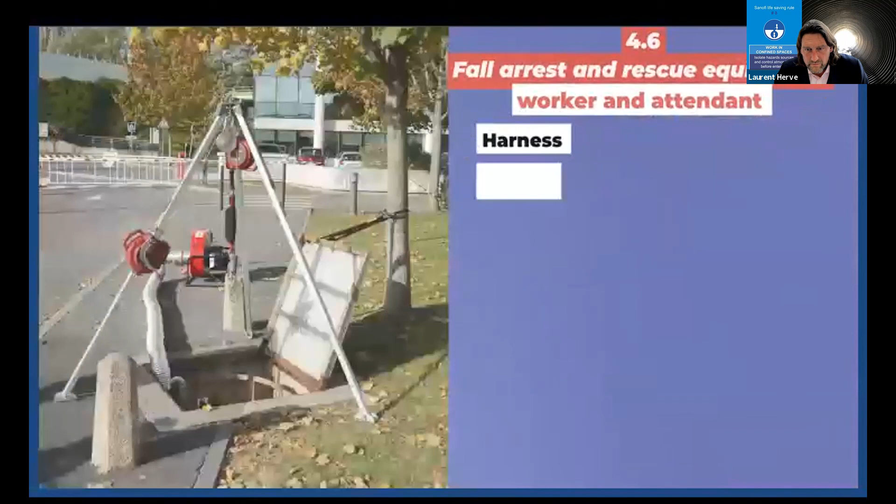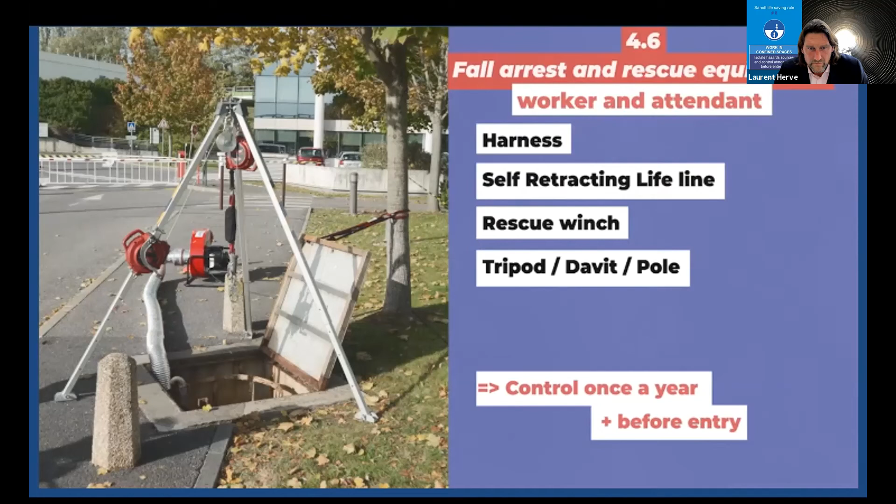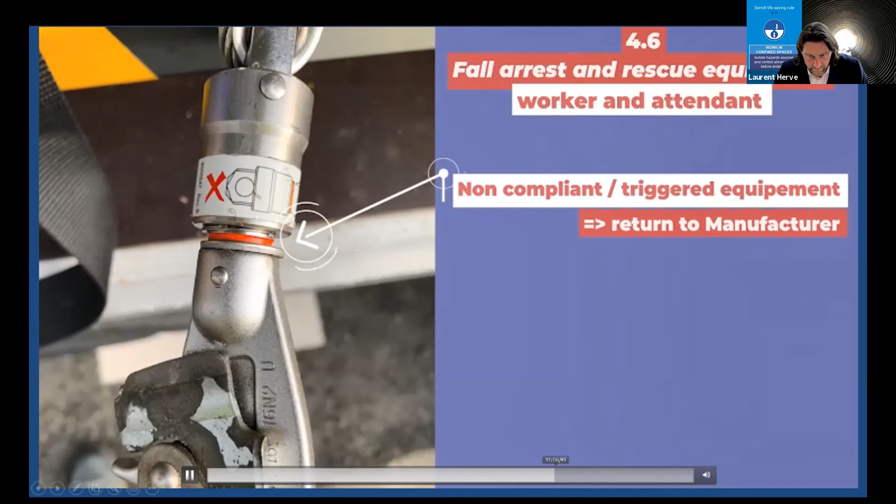Define and check the fall arrest and rescue equipment of the worker and attendant: harness, self-retracting lifeline, rescue winch, tripod, davit or pole, to be defined according to the mode of entry. They must be checked at least once a year and before each use. In case of vertical rescue through a narrow access, provide a harness with buckles at the shoulders. Any non-compliant or triggered equipment must be taken out of service and returned to the manufacturer for repair or replacement. Also check that the rescue procedure has been tested with realistic exercises, including the wear of PPE that may complicate the extraction.

Your preparation phase is now over. You are ready to start the entry phase.

Entering a confined space can be risky. Planning and safely executing the entry ensures you get out in good health.

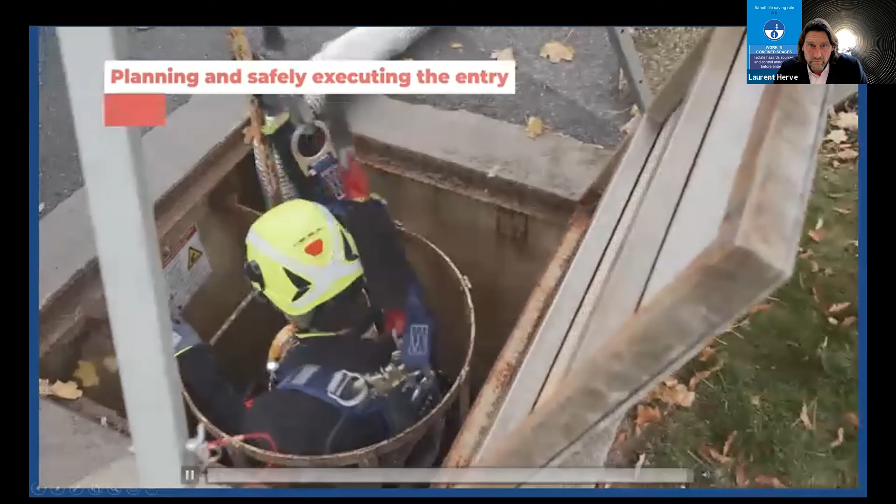So as you can see, this kind of video is for us - it's an awareness unit, not training again. We increase our commitment and good practice a lot on our sites through this. That's why we translate these movies, and the previous one, into 8 or 16 languages, and now it's mandatory for all people at our plants. As I mentioned, it's exactly the same process as in the life-saving rules. If you have to work in a confined space, or work at height, or implement or prepare an operation involving this kind of task, you have to follow this kind of awareness unit. For us, it was a great opportunity to improve the HSE situation.

Another thing we did in parallel was to work with Arnaud - thank you so much, Arnaud - and a lot of other people from the 3M team. We defined together what we need on our sites, and for this reason, 80% of situations we can find in a specific catalog, and the other 20% are specific asks and requests. We assess together, but in many cases we define very specific equipment, and we write a specific technical data sheet, because sometimes you buy one piece, another piece, and another piece from a catalog, but they need to work together - each piece needs to be okay with the others. It's very difficult to find the solution unless you're lucky enough to have a man like Arnaud, a steward not so far from your organization. For this reason we wrote more than 25 of these specific technical data sheets, and they are very useful for operational people on our side.

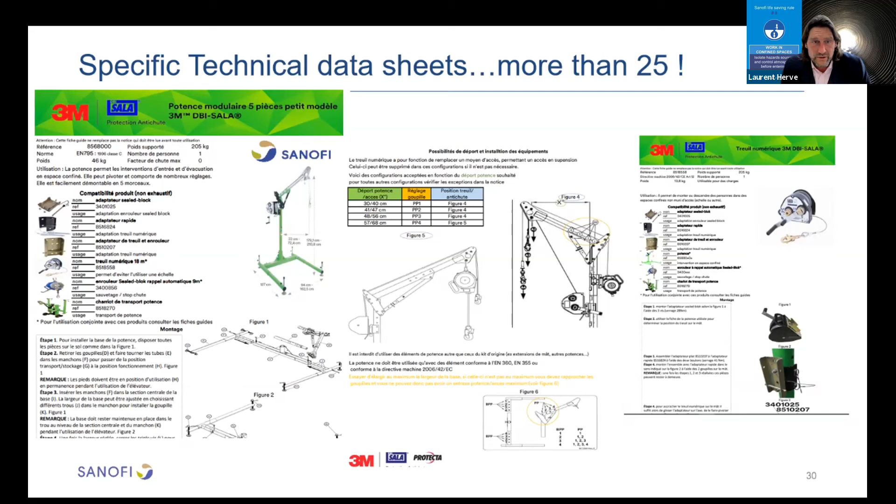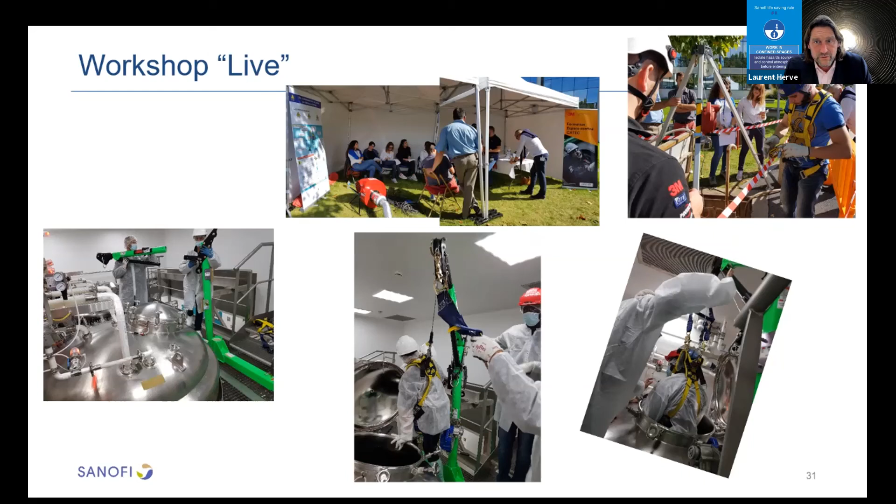To finish, because it's human history, we organized live workshops with 3M - typically at our plant, our vaccine plant, because we have a lot of tanks and so on, but also at other sites with manholes and similar spaces. So thank you so much for your attention, and if you have any questions, please don't hesitate.

Again, these topics are very, very important, because every day we can check a lot of subcontractors or other very big companies, and I think - that's why I wanted to share this with you - the level is not what we expected and what we require. Thank you so much for your attention.

Well, thank you for that, Laurent. That was an excellent presentation of the end use of confined space in the real world. That was fascinating. I was very intrigued with the use of

the Elios drone. Do you see that as the way forward with confined space, especially in the bulk areas that Sanofi look at?

Is there plans to include gas detection in that area, or is it just to take the human out of it altogether? Not for the moment, it's only that we sample the air and do a measurement before, but after we go with the drone.

But we have a project to have all in one. For the moment it's difficult with the quality department, because it's always a balance between quality and safety. But I think it's a great step for now, and we're working to improve the situation. We now have drones in almost all chemical and pharmaceutical plants to do that and decrease radically the entries into the confined space.